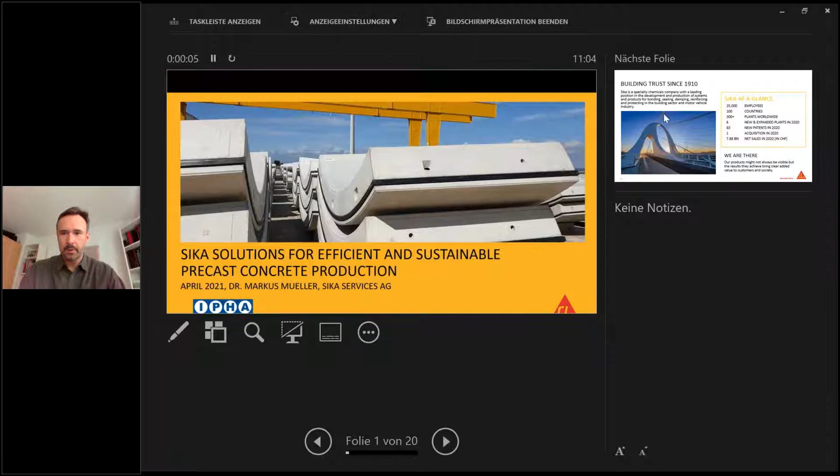Hello again, everyone. Thanks to Thomas for the technical support, and to Carsten Friberg for giving us this opportunity to introduce ourselves and at least have some kind of interaction in these socially challenging times. As it was introduced, I'd like to provide you our efficient and sustainable solutions for precast concrete production in a short presentation.

First, for all of you who don't know Sika yet, we are a construction chemicals company. We provide chemical additive and admixture solutions to concrete producers and many other producers and industries. Around 25,000 people work for Sika today in 100 countries, so on every continent you find Sika. Even if our products may not be visible all the time, since there is no Sika logo on the final end product, they are actually quite widely used and distributed. For example, about every second car drives with some Sika products inside.

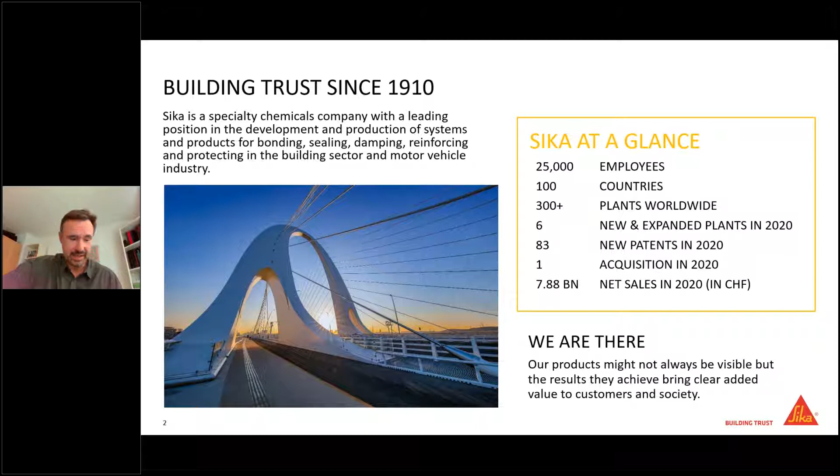So which markets are we working on? You see, first of all, concrete, but also many others: waterproofing, roofing, building finishing, flooring and coating, sealing and bonding, refurbishment, and several industries like automotive.

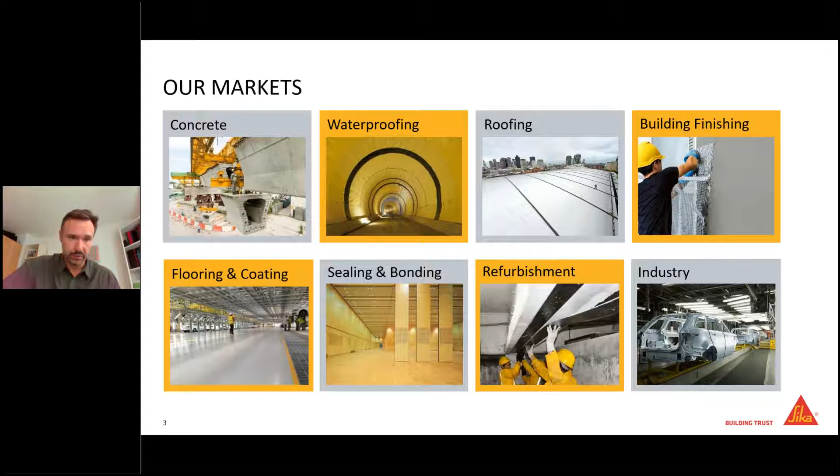We have a strong focus on R&D, since this is actually the backbone for our innovative solutions. More than 1,000 people are working in this R&D department, distributed in 21 technology centers all over the world. When I'm talking today about sustainable solutions, just to make clear, this does not mean that we don't have performance increase or cost efficiency. Actually, our focus is on adding value by increasing the performance plus giving additional sustainability benefits to our customers.

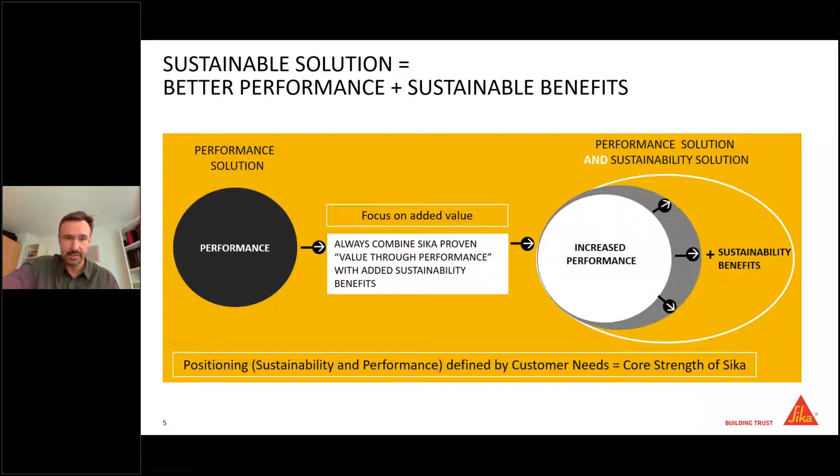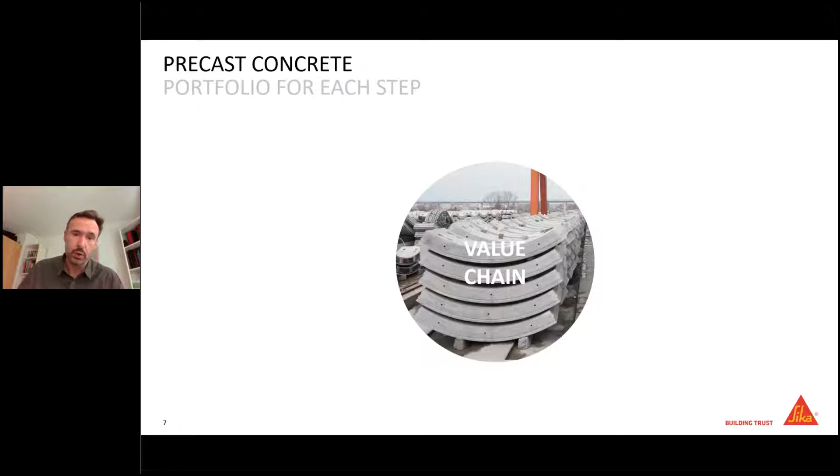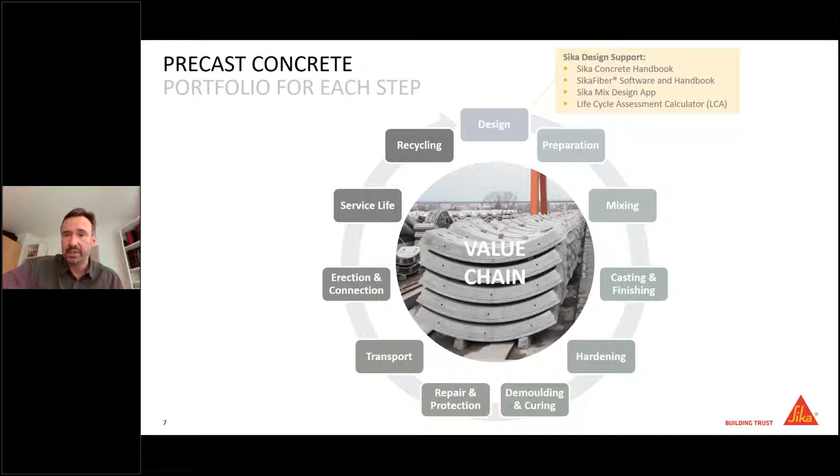But let's talk about concrete. Those who produce concrete elements know their value chain well. It starts from the design and ends in the final recycling after the service life of the element. Sika is a full range supplier, so for each of these steps in the value chain, we provide solutions. This starts with tools and services in the design phase, software, handbook. Maybe some of you have already downloaded the Sika Concrete Handbook. It's available at sika.com. Just released a new version, by the way.

But also in the later steps, several products get applied. I'm not talking in this short presentation about each of them. The most important or most relevant ones I will introduce separately.

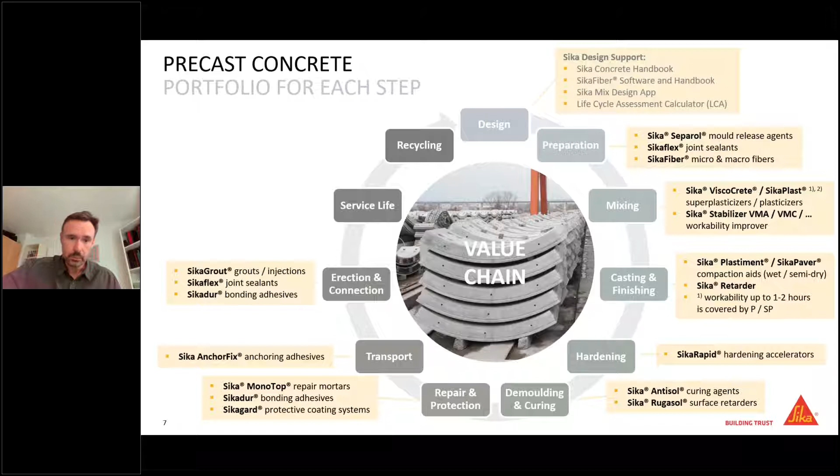Of course, most important for the concrete production process. In particular, the steps here on the right side. Here the admixtures which come into the concrete mix itself are most relevant, and at the same time more concrete admixtures are mentioned here, which are more focusing on the improvement of the service life, durability, concrete strength, concrete quality and aspect. But let's look further into more details.

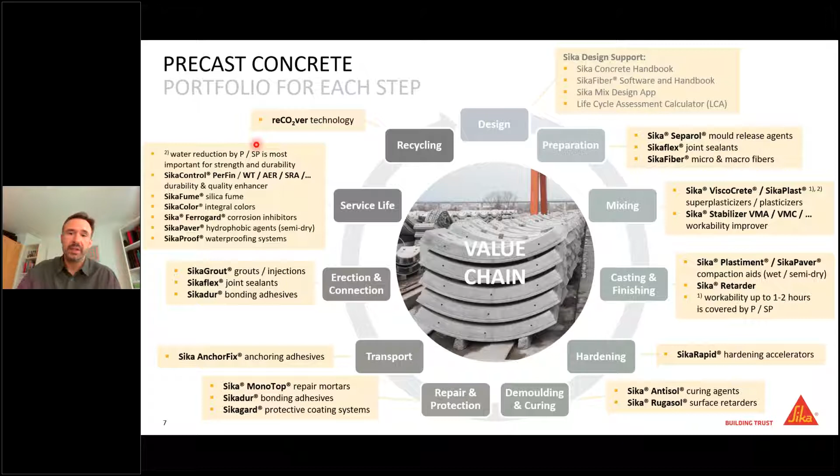We all know that we are living in a fast changing world, and a few challenges are ahead of us for the whole society, for the whole construction business, including concrete producers. That is driven by global megatrends and related laws and regulations and additional construction issues.

Challenges, especially for concrete producers, are carbon neutrality - producing cement or using cement with less CO2 footprint, using alternative binders, using other mechanisms or tools to reduce the clinker content in concrete. At the same time, resource efficiency will be a continuing challenge.

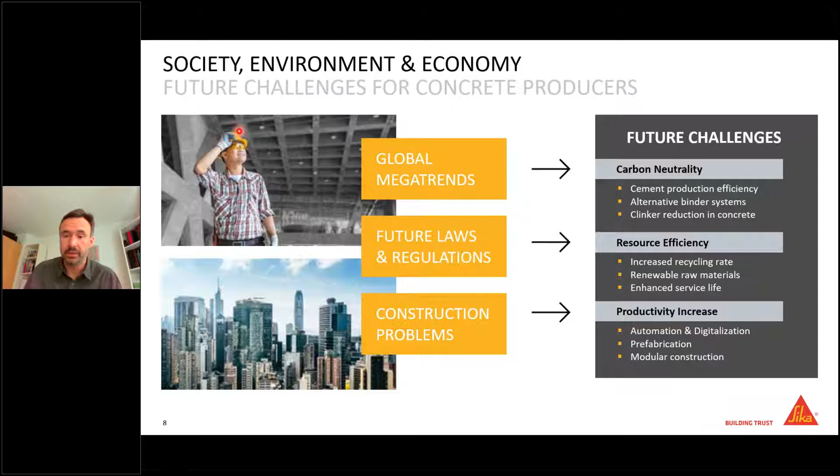Increasing recycling rate is here a key, but also using renewable raw materials and enhancing the service life of concrete. And last but not least, increasing the productivity with automation and digitalization, with prefabrication and modular construction.

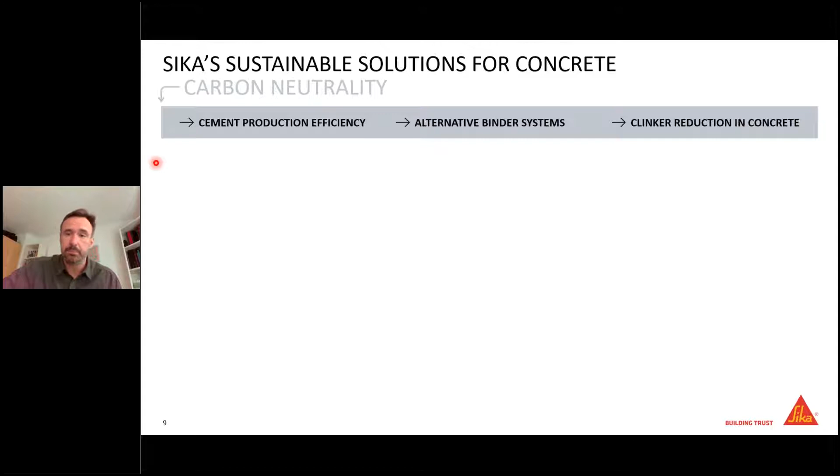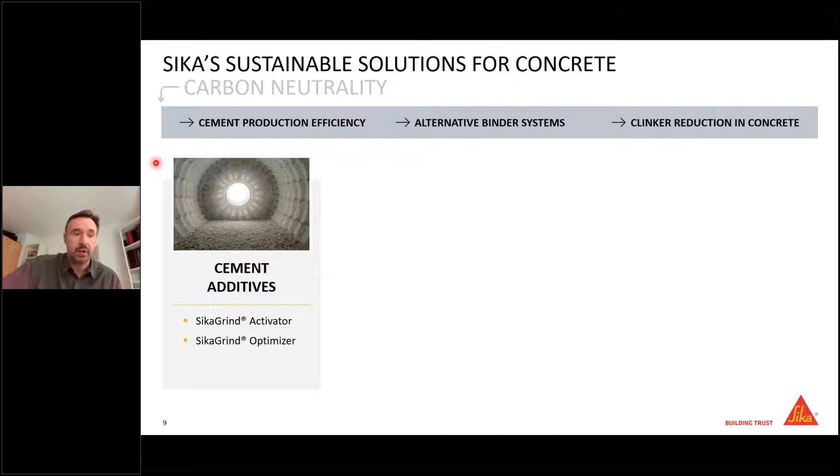And for each of these challenges, we have developed solutions. For cement producers, less relevant for concrete producers, but just to let you know, cement producers are using our additives to increase the efficiency of the milling process, but also to improve the quality of the cement. We have developed an admixture technology that allows a very interesting future binder system, so-called LC3, but I will come to this in a minute.

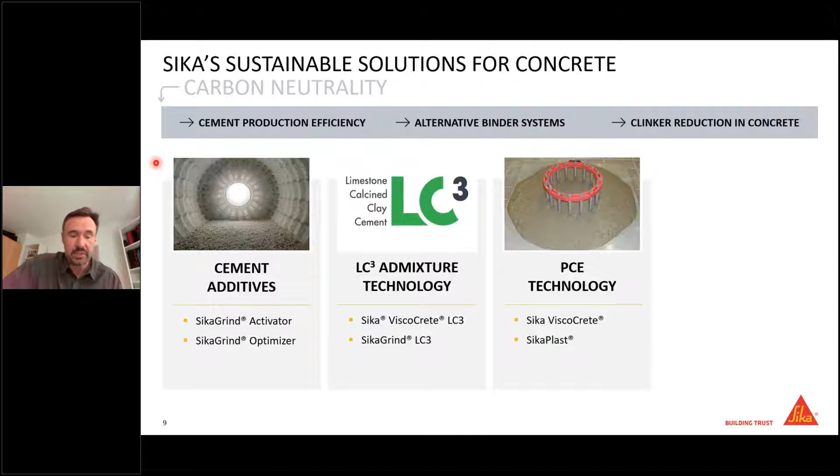PCE technology is a key technology. We believe many different targets can be met with it. And also an interesting recycling process has just been developed by Sika, the so-called reCO2ver process, which consumes CO2 during the recycling process of concrete, and the outcome is a high quality aggregate, and at the same time using all components of concrete, separating the cement paste from the sand and gravel, allowing for up to 100% recycling rate.

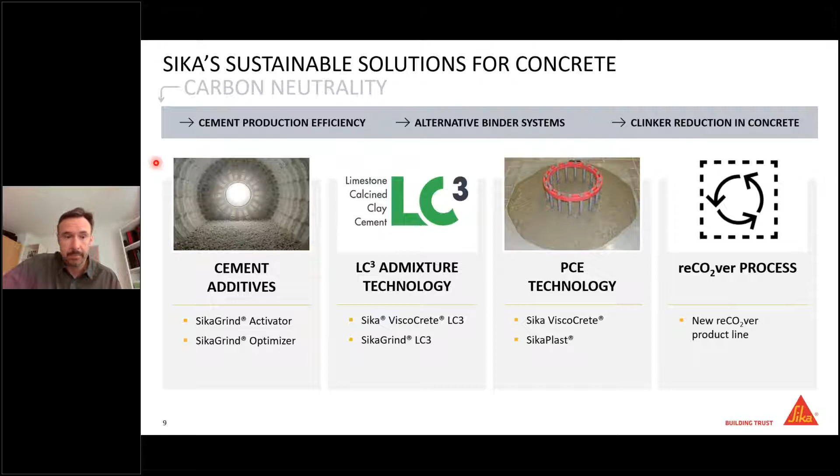So what does it mean, carbon neutrality solutions by Sika? To give you a feeling of the dimension, we are adding just a few drops of our chemicals to concrete - on average, maybe only 5 kilograms per cubic meter. But for cement production, our grinding aids can already contribute around 20% or more of CO2 reduction. And together with the benefits that concrete admixtures bring, we end up at a total potential of 40% CO2 reduction in concrete.

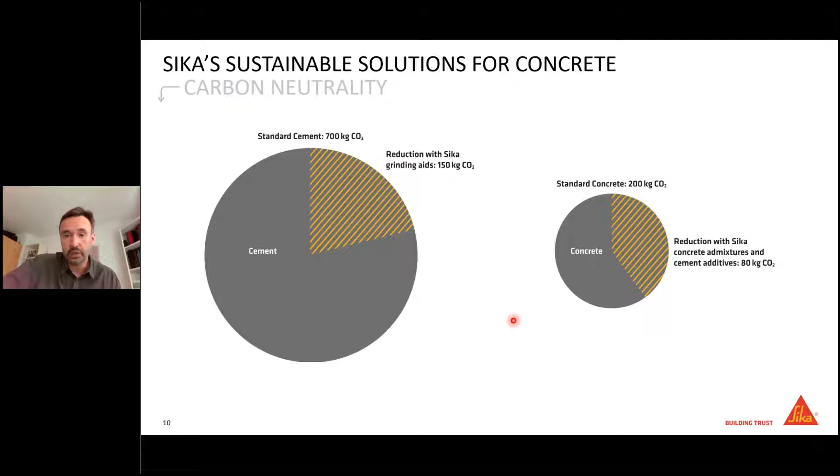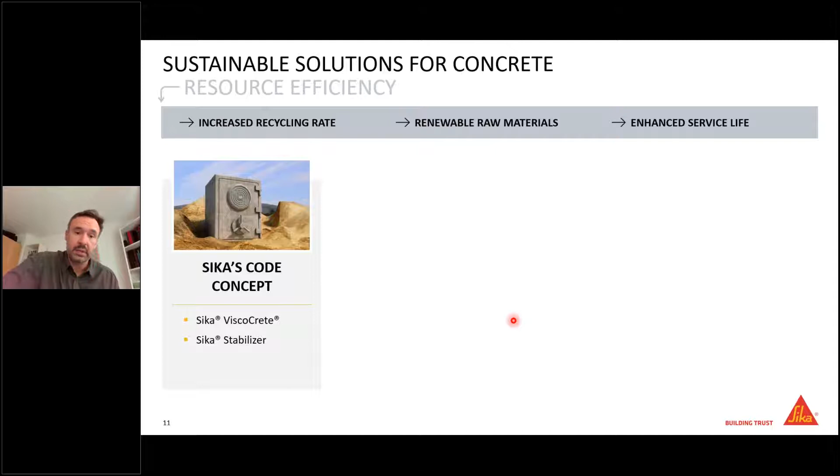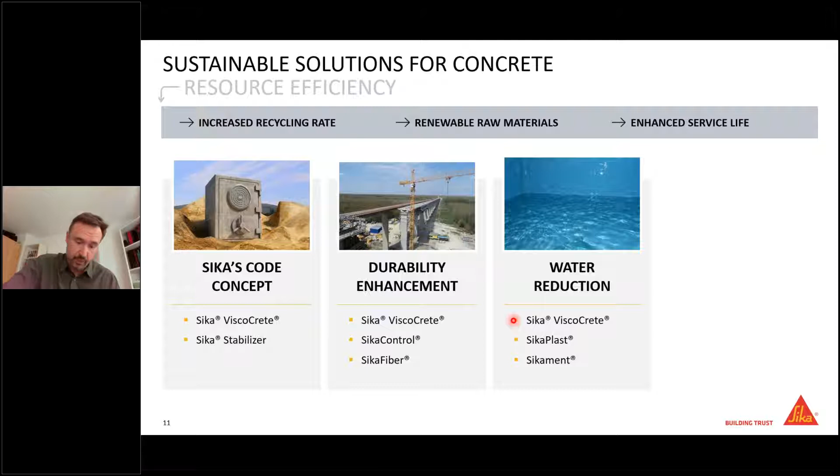Furthermore, concerning resource efficiency, we have tools developed including the Sika's Code concept, I will come to this in a minute as well. Durability enhancing technologies, water reducing technologies, which allow savings of huge amounts of water. To give you a figure, in 2020, the use of our concrete admixtures saved 6 billion liters of water.

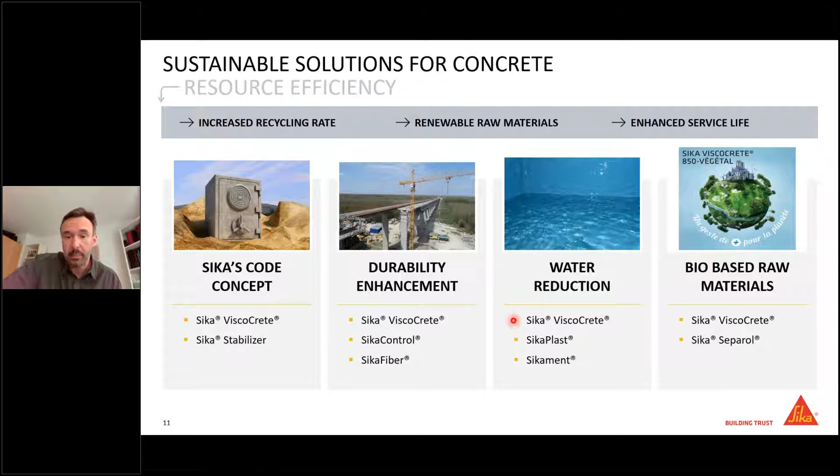And we are working on and have already developed bio-based products - products that are no more based on crude oil, but using renewable raw materials.

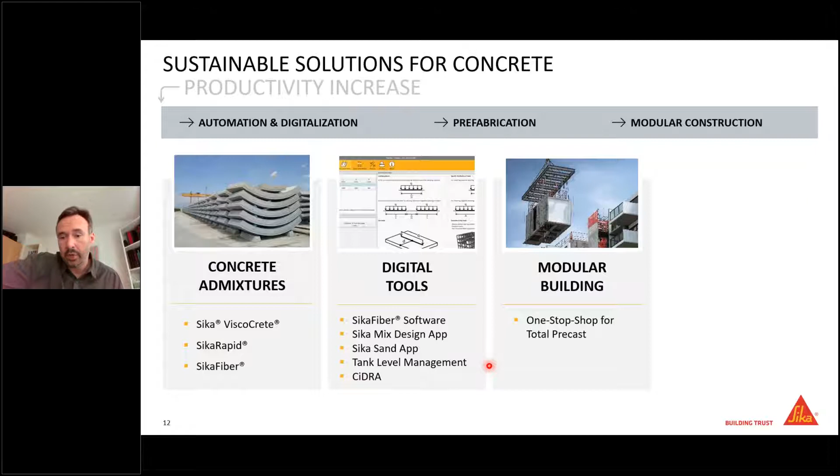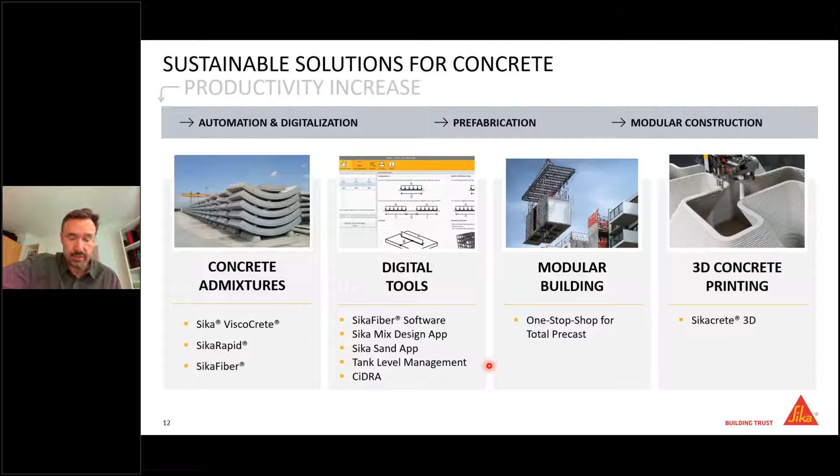For productivity increase, we have tools like the admixtures again. Also here, I will show you examples right after this slide. Digital tools, solutions for modular building. I told you on an earlier slide, with our total precast solutions, we would like to be a one-stop shop for modular building producers. And finally, we are working on 3D concrete printing. We have a complete technology system developed here, and whoever is interested in this technology is warmly welcome to get used to it.

So some examples of admixtures or products and solutions. The first, and I think the most important one, is the polycarboxylate ether-based superplasticizer technology. Most concrete producers know this and apply such products already. The most interesting benefit compared to conventional plasticizers is that you can really change the architecture of these polymers and make tailor-made solutions out of it, with the target to cost and performance optimize concrete mix designs.

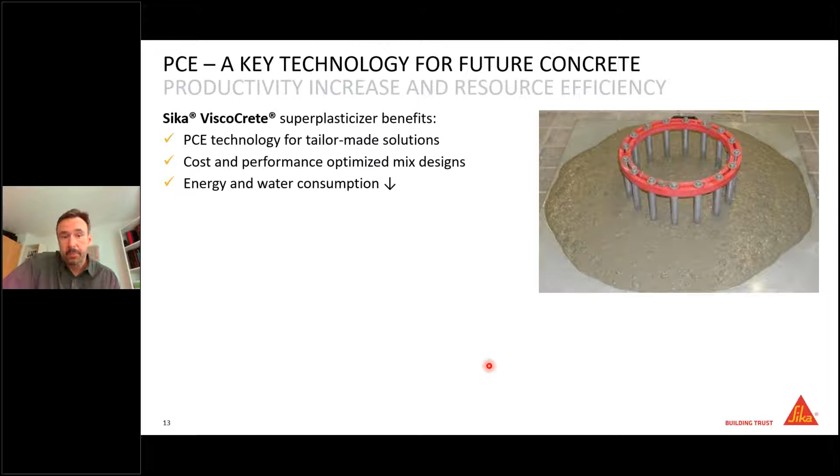So reducing water cement ratio, saving cement, and further benefits - reducing energy, reducing water consumption, enabling easier processing techniques like self-compacting concrete, which makes the whole process of concrete production more productive, reduces operating costs, and increases or improves surface quality, strength, and durability.

This technology also allows for slimmer element dimensions, in an extreme case using high performance or even ultra high performance concrete, which would not be feasible without PCE technology. And of course, with all these benefits, this technology reduces the environmental impact of the complete concrete.

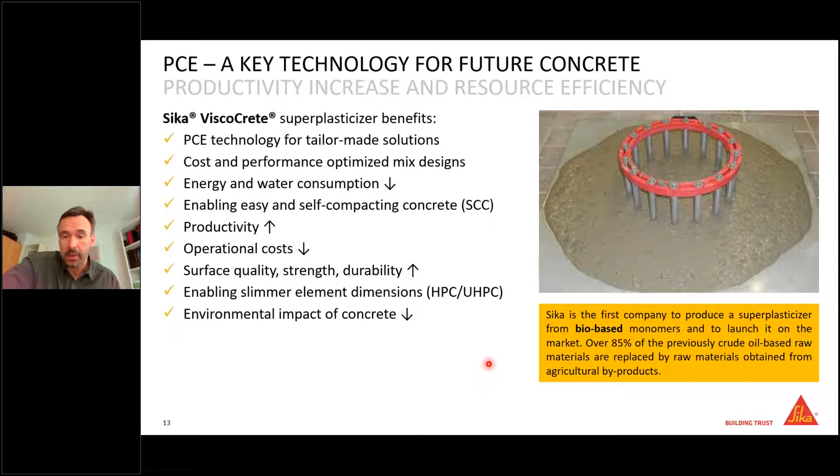And Sika is proud here to have the first bio-based product on the market. The majority of these products are usually crude oil based, and our products here are based on agricultural byproducts.

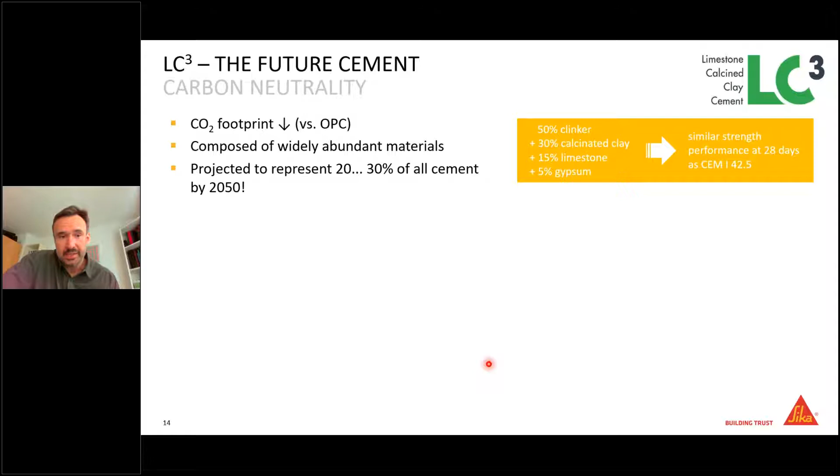PCE technology, together with other admixtures, allows the usage of a very interesting and promising future binder system, the so-called LC3 technology. I don't know if you are familiar with this. It's a very challenging approach, reducing the cement clinker by 50% by adding calcined clay and limestone to it.

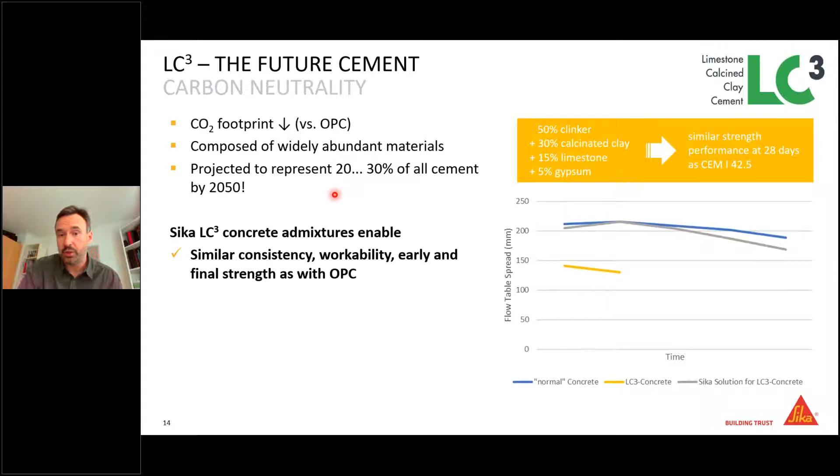The challenge was that a concrete produced with such a cement has significantly weaker flow performance or consistency. So it was necessary to develop admixtures which allow the use of such binder for concrete with similar consistency, workability, and early and final strength development as with OPC. We believe, and not only us, that this is an upcoming technology projected to represent 20 to 30% of all cements by 2050.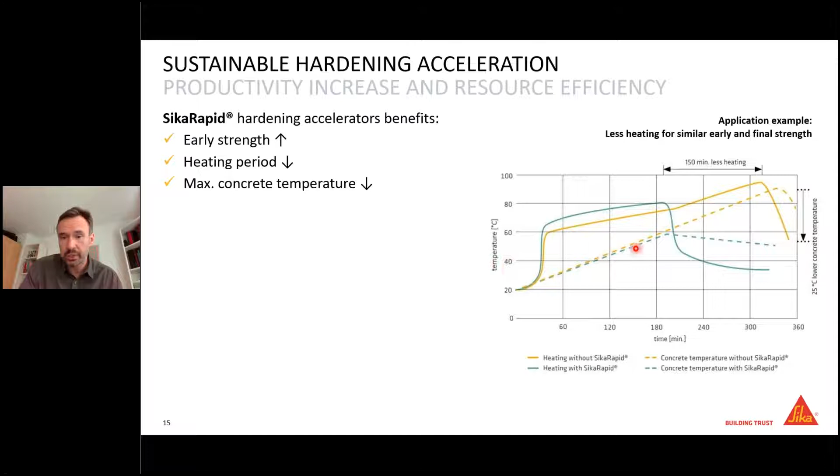You see the concrete temperature here in this dashed line. It's very important not to exceed a certain value, maximum 70°C is said to be the limit here. Otherwise, you may run into significant durability problems, cracks, and so on.

The benefit is energy consumption reduction, productivity increase, shorter cycle times, with that operational cost reduction, and clinker reduction. So if the amount of binder or cement was required to reach a certain early strength, the application of such a system allows for binder reduction. At the same time, durability increases—less OPC is a key reason for the durability increase, but also the mentioned temperature effect, reaching not such a high maximum temperature, reducing the overall carbon footprint of concrete.

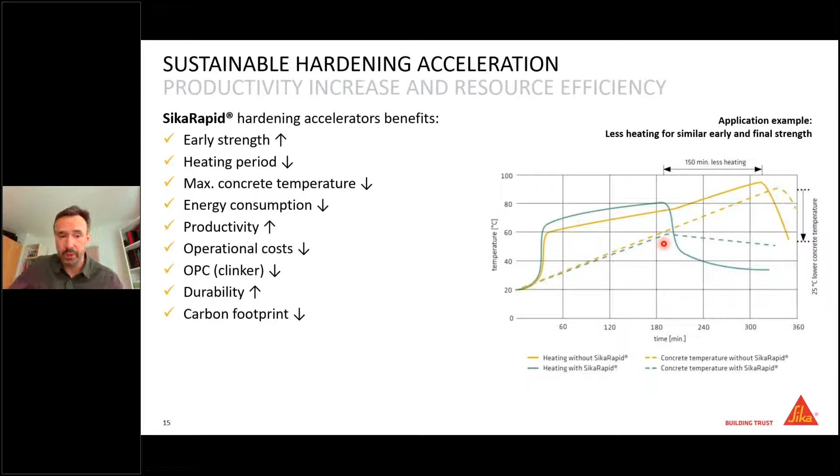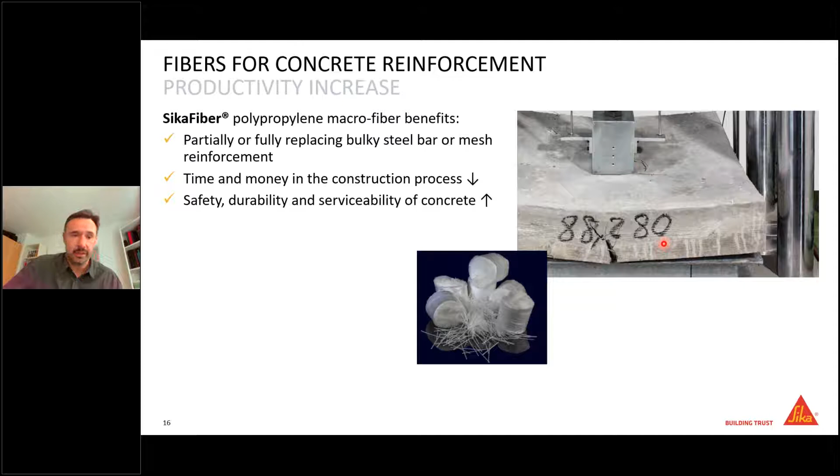Another technology I don't want to miss introducing to you is the Sika fiber technology. These polypropylene macrofibers can substitute reinforcement. Fibers are already widely used for crack reduction and increasing abrasion resistance, but actually these fibers can partially or fully replace steel, which saves time and money in the construction process, makes it safer and more durable, and increases concrete performance.

These are easy to handle products and easy to dose, with self-soluble packaging, for example. We also provide a design software which allows the calculation from a mesh to the fibers.

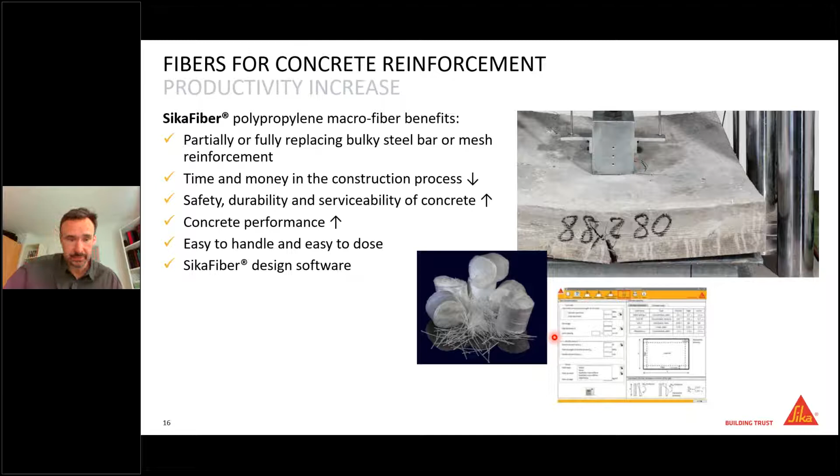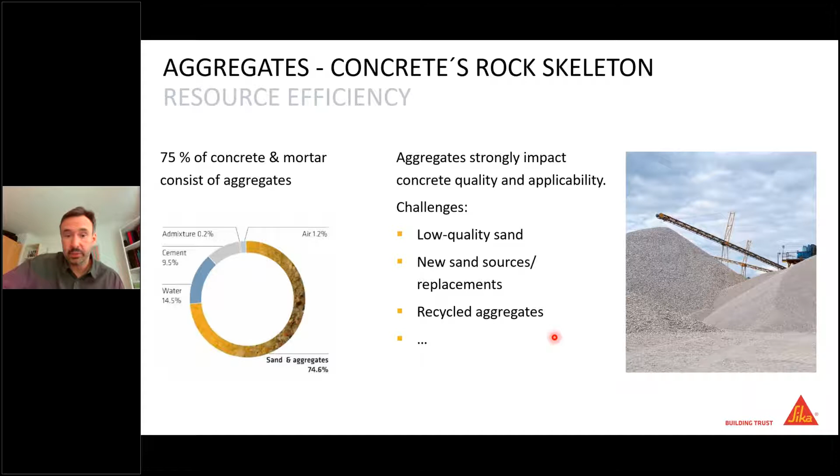Another technology, actually the last one I would like to introduce in this short presentation, is targeting aggregates. You know that the majority of our concrete is made from aggregates—70%, 75% of concrete and mortar consists of sand and gravel. The aggregate quality has a strong influence on concrete quality and applicability. So the challenges will be, and are, using low quality sands, using new sand resources, sand replacements, recycled aggregates, crushed aggregates, just to mention some.

What we provide here is a concept, the so-called Sika Code concept, where we analyze the customer challenge. We have certain tools, including the mix design app, several special testing tools and services that we provide, and a range of products which allow the use of challenging sands. This is something where we cannot just simply provide a product to a customer—we offer our service to work out the solution together with concrete producers.

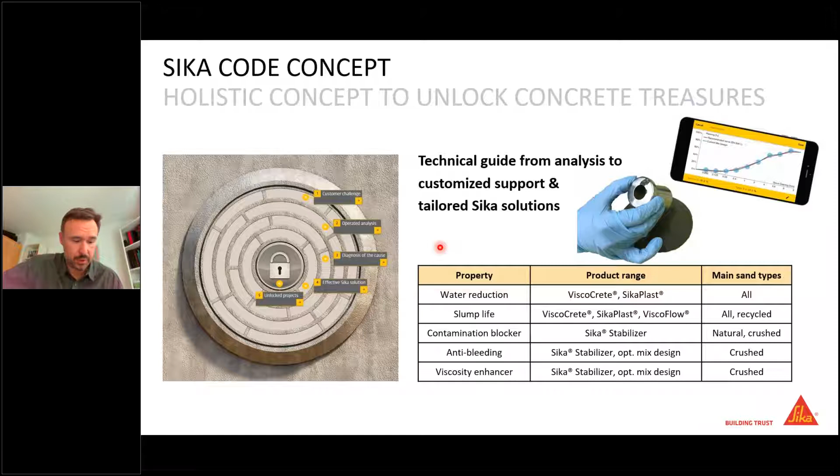My time is over, 20 minutes. Before Thomas reminds me, my key takeaway message for you is: megatrends like sustainability and digitalization drive the growth in the construction industry. And I hope I could convince you that Sika is the right partner with its long-term experience, its focus on innovation, addressing customer challenges, adding value through performance and sustainable solutions, having a full range ready for precast, and being globally active while locally available.

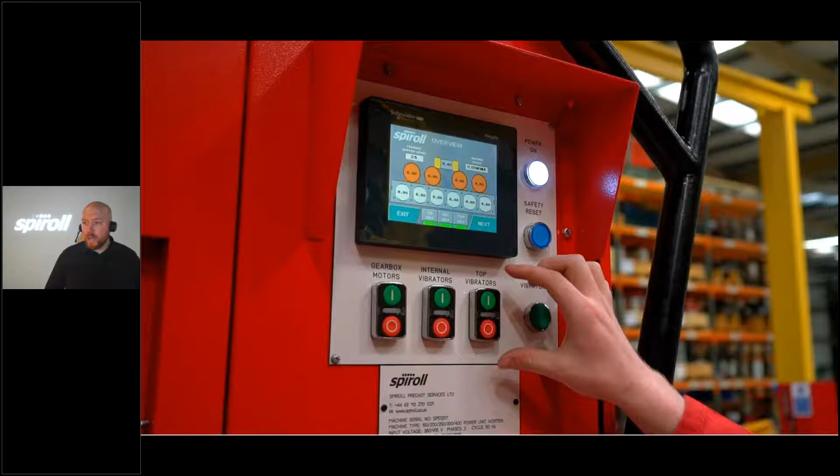I look after the production and the product commercial sales for the CCL and Spiroll company, of which we have 31 privately owned subsidiary companies internationally, with currently about 650 employees. These are just a couple of shots from the factory, showing some of the control systems of the extruders, some of the build area, and a couple of the machines in action.

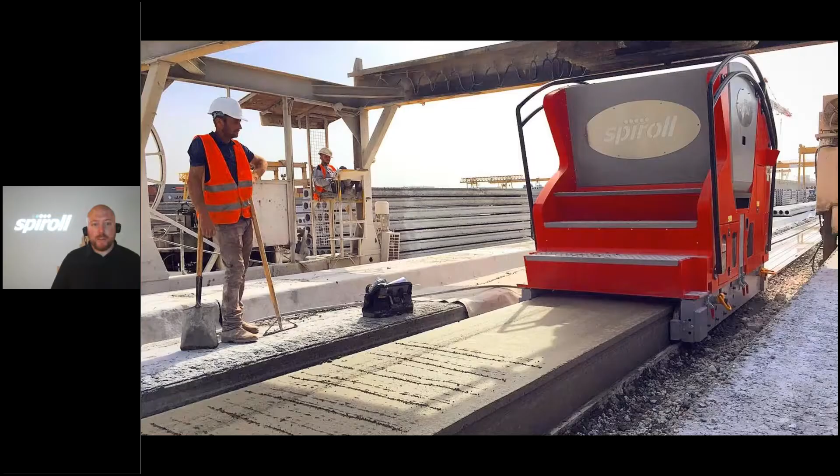This is a 400mm slab, and we do have a couple of outside plants with the high frequency vibration of the slabs. You get a really heavily compacted slab, which actually stands up well to weather conditions on outdoor plants. This is a recent installation in the Ivory Coast in Africa, which is the first producer in that region.

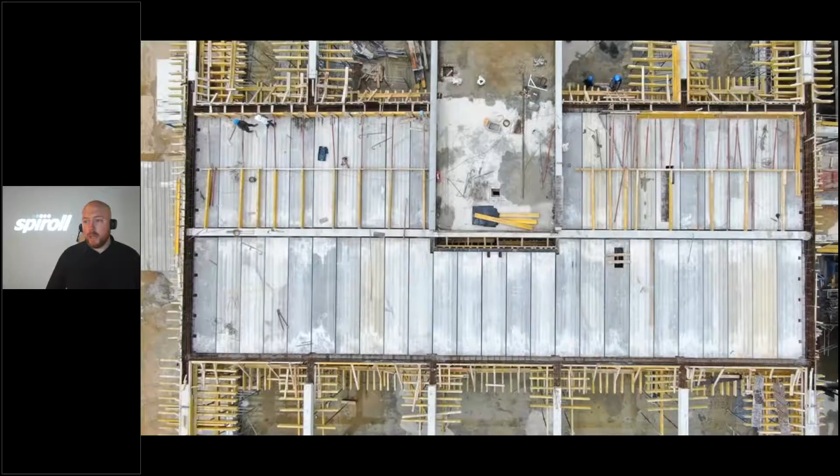So just back to a bit of an introduction on myself. I'm an engineer and graduated from the University of Manchester with a degree in mechanical engineering. I've been with CCL and Spiroll for nearly 9 years, but before my employment, I worked for several years in an automotive manufacturer, and most interestingly in the quality side of production.

So my talk today will focus on a failure analysis tool which is ingrained in the automotive industry and is applied to almost every part produced. This photo just shows an example of some of the turbocharger parts that I was involved with.

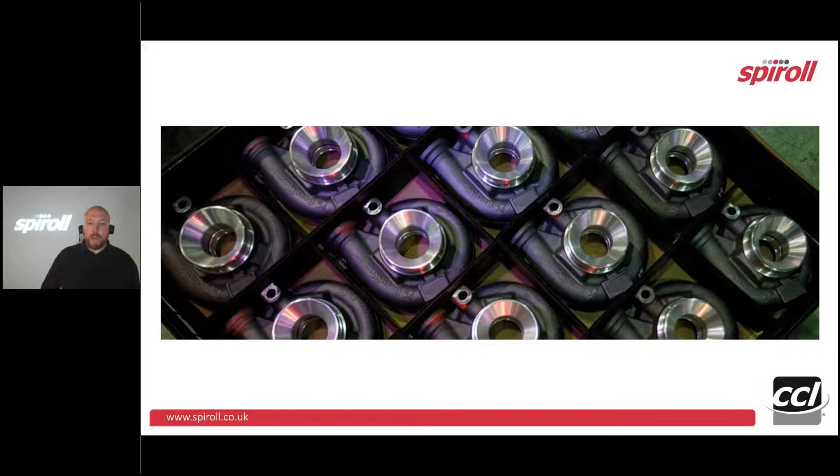In my role currently, I'm personally involved in the volume production of construction products, so wedges and barrels and things. I'm also involved in their certification process and production control from a CE marking perspective, and also other international certifications. But in my experience, none of the construction industry requirements really push the envelope of analysis like some of the other production industries do.

So in this presentation, I will simply apply some of the thinking of some of the automotive quality systems to a precast manufacturing situation. This is also, as part of IPHA, we're all manufacturers to some extent, so this is entirely applicable to not just concrete product manufacturers, but machinery and everything.

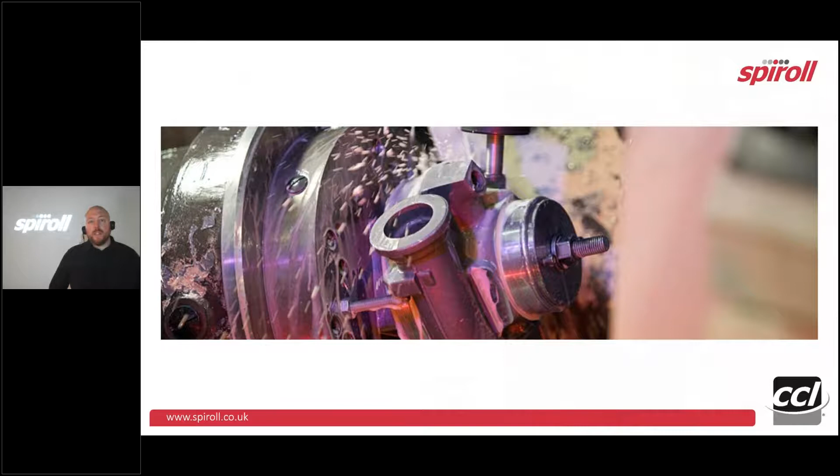In my presentation, production support activities are defined as the processes and functions required to produce manufactured goods in a consistent, repeatable and safe manner. So this could be raw material control, equipment maintenance, batching control, and anything which is linked really to the final end product.

So most of you, if not all, will have some form of quality management system, and some can be sort of basic and certified to regional standards, and also recognised by other international bodies. There are also requirements from a product-to-product point of view that may be required. But basically, rigorous process and factory production control goes further than the standards and the legal legislative requirements.

And the analysis tool I will introduce you to today is called the FMEA. FMEA stands for Failure Mode and Effects Analysis. It's a systematic, proactive method of evaluating a process to identify where and how it might fail, and then to assess the relative impact of these different failures in order to identify parts of the process that are most in need of change. So it's quite similar to sort of risk assessment type thinking that some people may be used to, but not just from a health and safety point of view.

This applies to your production processes. It can also be applied in a design setting as well.

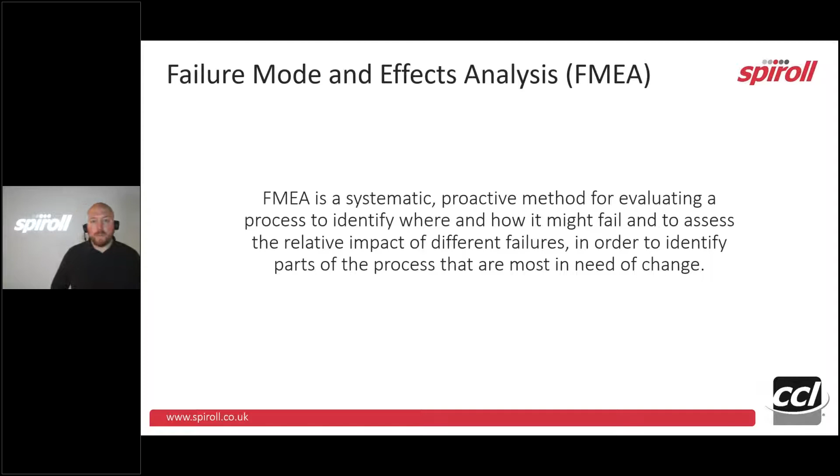FMEA, Failure Mode Effects and Analysis, is a highly structured, systematic technique for failure analysis. It quantifies the severity, the occurrence and detection likelihood of failures. It is used widely by the military, aerospace, automotive, tech and food industries.

Typically an FMEA is produced for each product or family of similar products, and the FMEA document is best developed by a cross-party group from different departments within the company, so you get a different aspect from various departments.

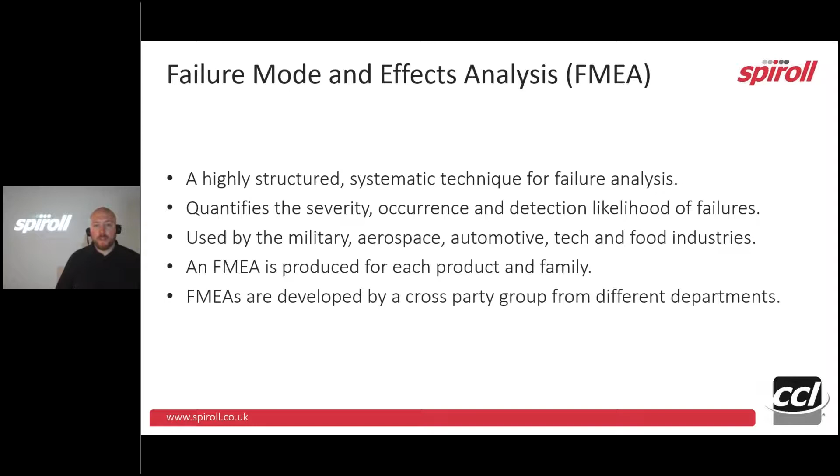An FMEA is developed in a table format, and shown on screen here is an example, just very simplified. I've personally seen these run to several hundred lines for certain products, but this will focus simply on the function of a car tyre as an example.

The function being the supporting of the weight of the car, the traction and the comfort. So imagine that's the function we're looking at in the process step.

Then the second column has the failure type, in this example a flat tyre. Alternatively, this could be an out of balance tyre, a worn tyre, low pressure, high pressure, wrong specification, and each of these avenues would have its own developed line of analysis.

After that, you decide in your cross-party team on the potential impact of the failure and score the severity of this impact, given by a predetermined score system. In the severity column, this could be a score of 10 for a fatality, down to a 1 for a failure noticed by less than 10% of the consumer or customer, with all other scores described between 1 and 10.

Then the next column is the cause of the failure. Again, there could be multiple scored 1 to 10 on the likelihood of occurrence, between 10 meaning you pick up the failure every time, or 1 meaning it almost never actually occurs.

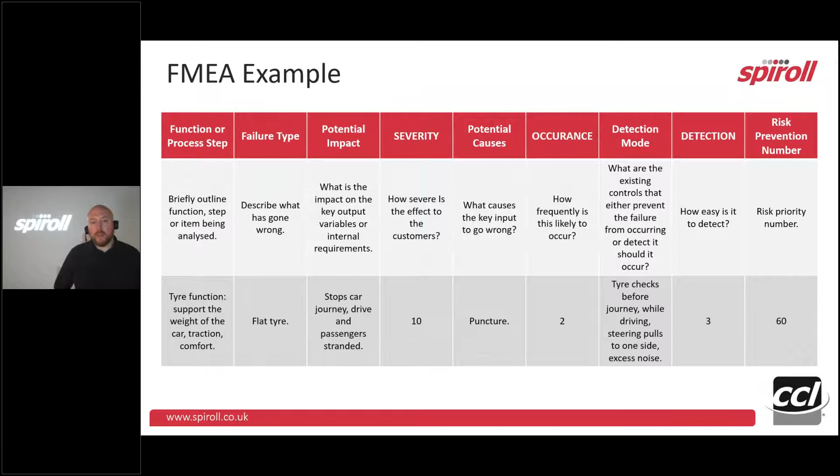The manufacturer can then introduce actions to the particularly high risk prevention scores, along with responsibility and target completion dates for the actions, and can then rescore the failure, severity, occurrence and detection scores with the control actions in place.

In this example, the action is to carry a spare tyre and the tools required to change the tyre. When this is rescored, it brings the overall risk prevention number down to a manageable level.

This document, once formed, acts as a dynamic document that over time will, in very detailed form, describe the processes and controls required to ensure your product is manufactured in a consistent, repeatable and safe manner.

So from now, I will apply these to four simple best practice examples using the severity, occurrence and detection FMEA thinking.

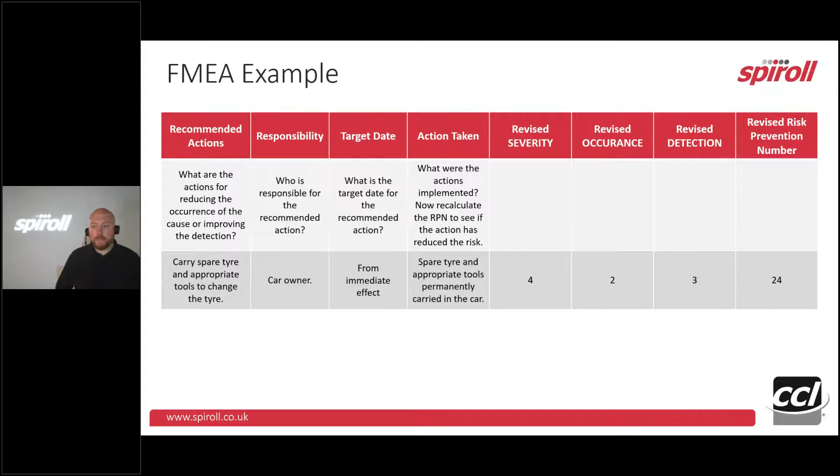My first example is barrel and wedge usage and their maintenance. All Hollowcore and many other precast products use pre-stressed wires or strands in their production, meaning they use barrels and wedges to grip that tension. Let's focus on the wire and strand stressing, for instance.

The severity of a failure can be extremely high. The rigor and maintenance of the care routines will affect the occurrence, and the detection score is also high because the detection of a potential failure is difficult until the actual failure occurs.

The resultant controls typically, but not always, applied are things we have seen and also implemented, like stressing alarms - an alarm ringing in the factory when stressing is carried out - and strand containment chains up the bed.

There's also care and inspection training and work instructions for the operators for the products, routine replacement of equipment using batch control systems so you know which are clean and which are in use, and typical stressing guards and any segregation in the factory and working environment.

We supply many factories with barrels and wedges, and we do see some fantastic processes in place, but also sadly we see some pretty poor ones as well.

The million dollar question is usually, how many times can we use these? We typically say with great processes you may see hundreds, 300, 400 uses, but if they're really poorly looked after, you could have just a handful of uses.

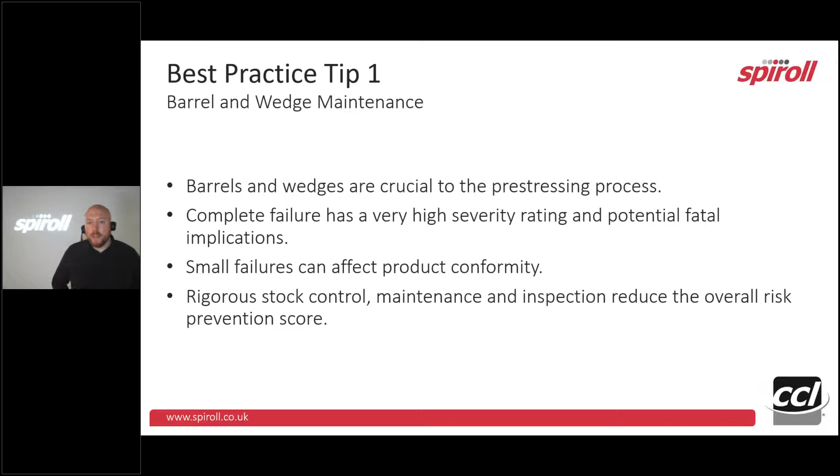My second example is looking at calibration of equipment, tracking and its maintenance. This can apply to anything in the factory, be it extruders, stressing equipment, cranes, portable electric items such as grinders and drills, or even fixed installations like electrical or pneumatic systems. All of these pieces of equipment and systems have failure potentials, each varying in severity, likelihood of occurrence, and how easily they are to detect. But the best practice approach, which we've implemented in our production environment and site operations, is a rigorous asset management system.

We developed a system through Microsoft SharePoint that allows us to allocate a unique identification number to each item or system. We then plan the maintenance, calibration, servicing, inspections or testing for each item, along with a location and an owner. The system uses a red, amber and green status tag to easily show if the asset requires attention, so we can plan these activities ahead of time and make sure they're completed in a timely manner. From an FMEA point of view, this reduces the risk prevention score and shows controls are working to prevent failures. Again, in factories we visit, often these types of processes are not in place.

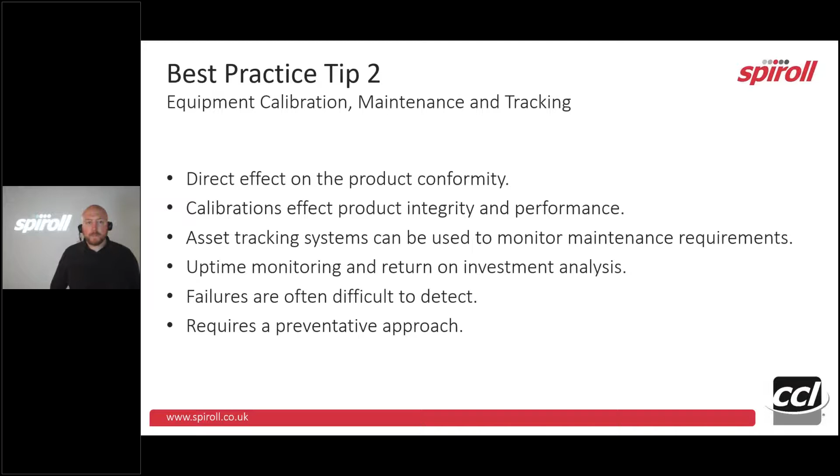My third point is looking at raw material inspection and traceability. I could ask, do people have robust and rigorous incoming goods inwards and material checks? Because failure of your raw material to meet specification can have severe effects on the product, which are also likely difficult to detect.

This would be a good use of FMEA, to look at each of your raw materials going into the product and analyze the effect of failure to meet the required specification. This can even go so far as routinely checking quantity, which can be difficult for bulk materials. Our best practice advice, similar to what we've implemented to reduce the risk prevention score, is to have a robust set of simple inspection techniques built into the process.

These could be built into the process using simple specification work instructions that operators could understand. Often material standards can be very complicated and not easily understood by anyone other than technical staff, who are often not the guys actually hands-on dealing with the material.

By employing a simple set of codes, for instance we use things like MAT 001, MAT 002, up to MAT 054 now in our factory for each of these materials, our staff can easily check the material certificates supplied with the products and other delivery requirements we might put, for example for strand bundles we have a direction, a maximum size and weight, and things like that. Again, this helps limit failures in the process.

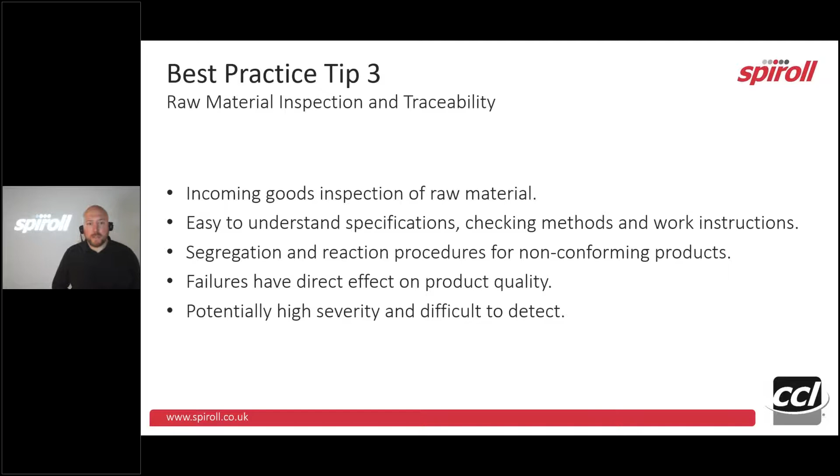The final best practice tip, a slightly different way of thinking about it, is talking about the extruded or slip-formed slab profiles, strand wastage and production planning. If you consider the failure of any of the above, this can have a financial impact on the business. Other IPHA presenters have touched on this previously. I recall a presentation by Hollowcore and some of the Elematic guys explaining that the proportional cost of product taken up by actual raw concrete material is the highest cost per linear meter.

So failure could be in not optimizing your slab profile design, and the failure of this again can have a financial implication. You could be producing using old technology, poorly maintained machines, or wrongly set machines. The severity here has a high financial impact, the occurrence is typically quite high, and the detection can be pretty low. There are simple pre-production check sheets we can supply, or work with people to make sure machine settings are checked before the production run is started.

Another issue we see quite regularly is how much strand is wasted at the end of the production bed. You can introduce a small modification to your abutments to shorten the wasted strand at the end of the bed. We've done this several times with manufacturers, modifying beds and their barrel and wedge setups to reduce this.

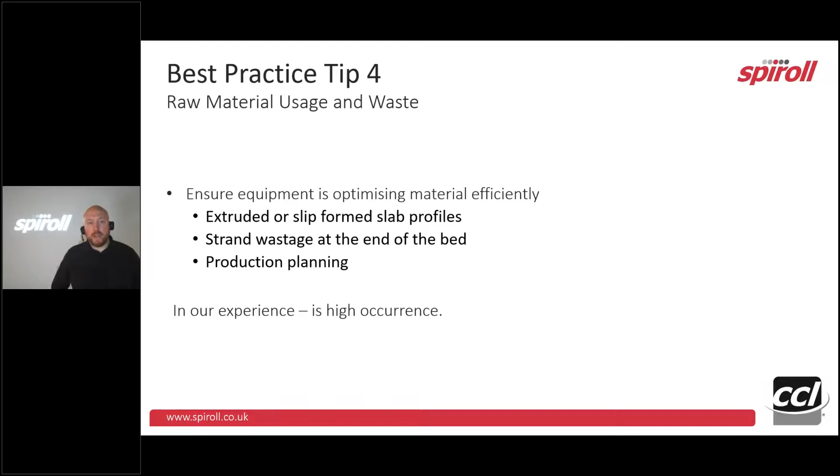In conclusion, it's been a whistle-stop quick tour of FMEA and failure-based thinking, and I hope it has been of interest and maybe sparked a thought in this area. In my experience, construction product manufacturing often lags behind other industries in adopting and implementing these lean process controls. I hope in the future the industry may adopt these techniques and learn from sister industries a bit better. As Tom said earlier, he can share our details after this. If you have any questions, this isn't specific to Spiroll, but we would happily assist and point you in the right direction. Thank you for listening, and I'll pass you back over to Tom now.

Thank you very much, Ed. No questions from the audience. To be fair, you answered the only question I would have had, about adoption of things from other industries into the concrete industry. I think it's a fair point you make there as well. Thank you, thanks very much.

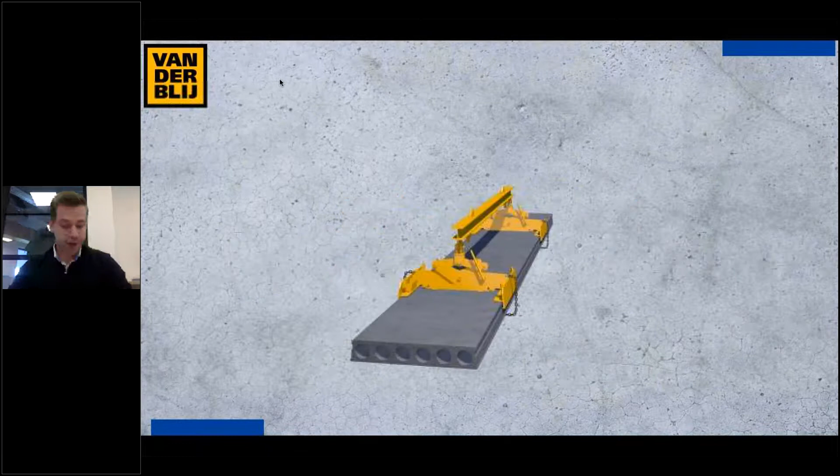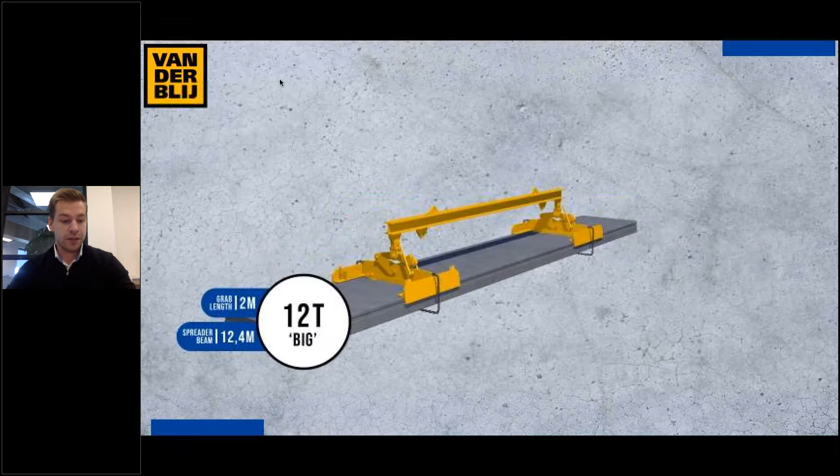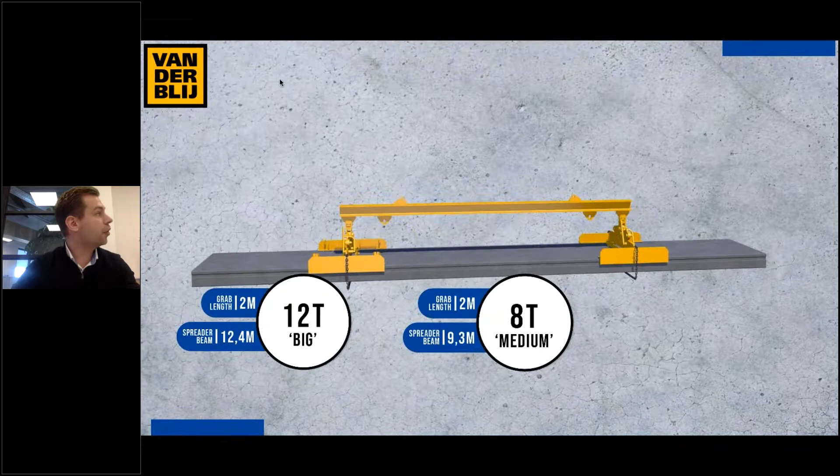Here you see a mechanical grab used for lifting and mounting on the construction site. We have three standard types starting from 12 ton. The length including the grabs is 14.4 meters. We also have an 8 ton version with a length of 11.3 meters including the grabs, and a 4.2 ton version. We provide all these grabs used on the construction site with safety chains.

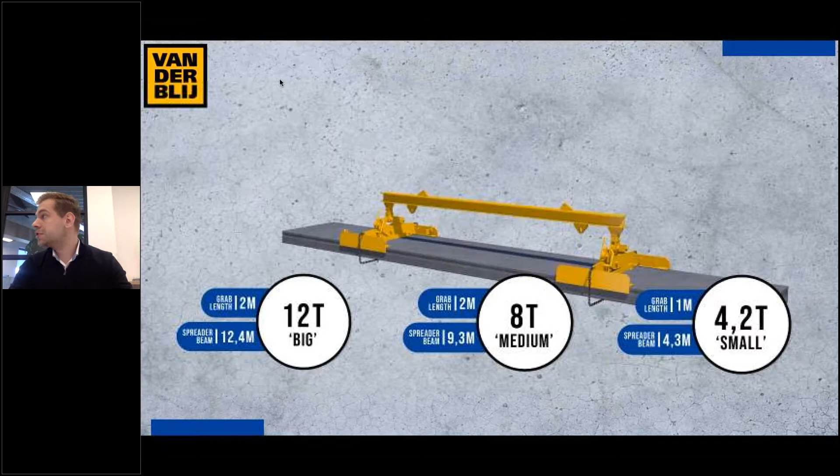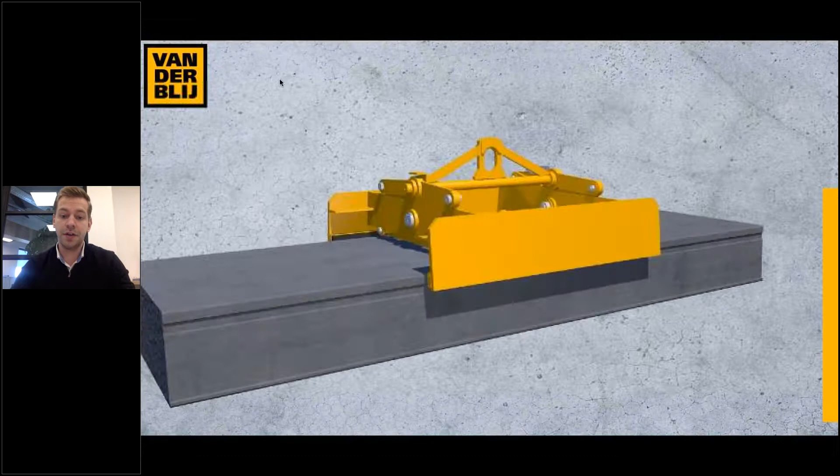The safety chains are used for lifting in high-risk areas like construction sites. We also have grabs used for lifting in the factories, and we provide these with rubber pads because of the strength of the concrete. When we use steel pads in this situation, we could possibly destroy the concrete, so for that reason we use rubber pads to lift these Hollowcores.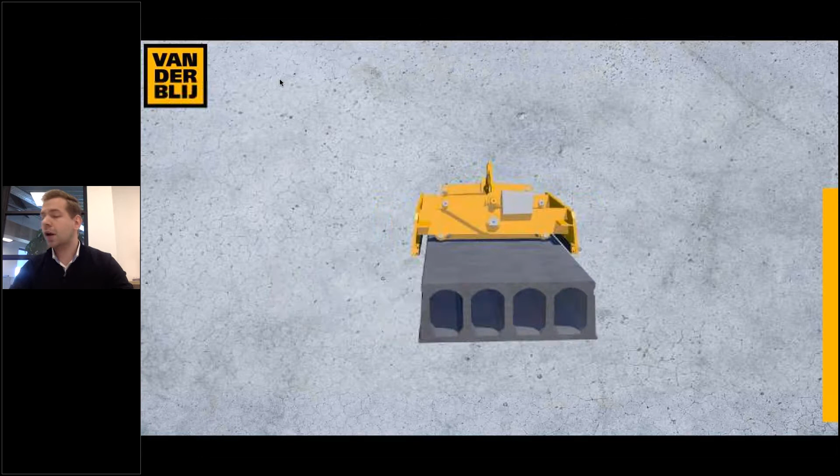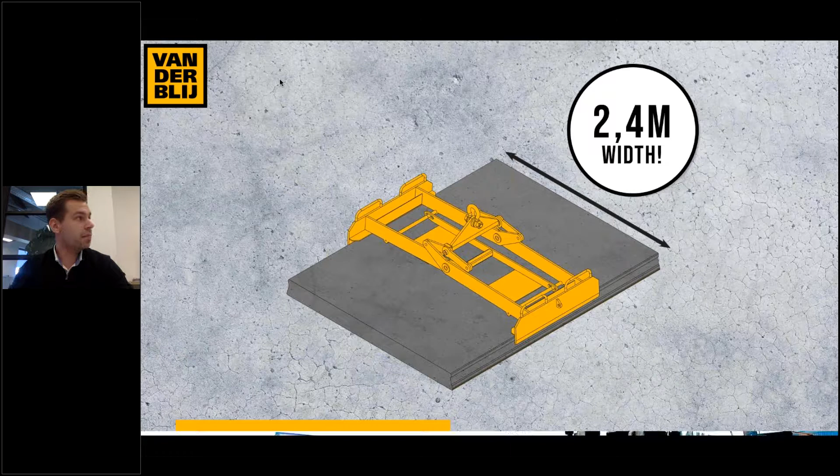In the next 2 slides, you see 2 different custom-made solutions. This one is for the 2.4 meter width Hollowcores, and the next one is used for the forklift trucks. So we can provide custom-made solutions. Everything that's possible, we can provide. We can make, we can produce, and also we can advise you on the best possible way to handle the Hollowcores at which state of the construction.

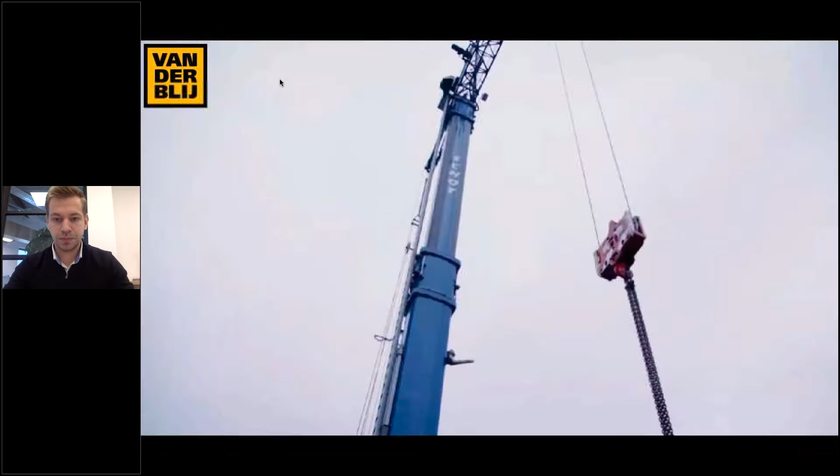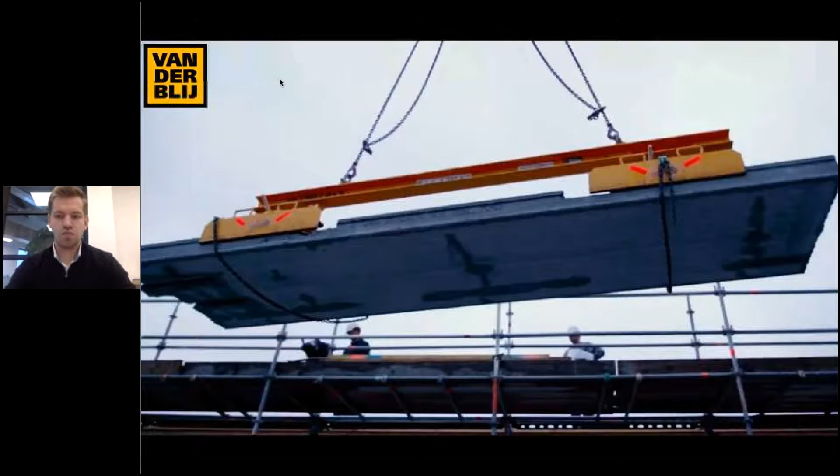Next, some short video, so you could see how the grab used for mounting and lifting on construction sites is used.

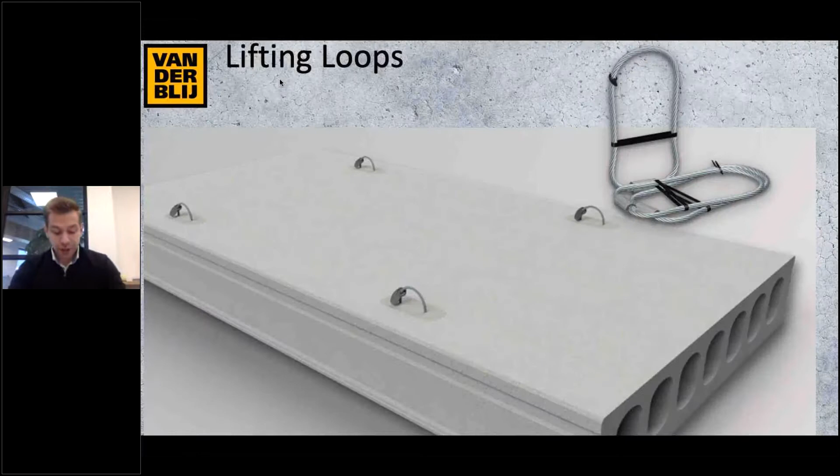Next, mounting and lifting Hollowcores is also possible with cast-in options. First we're going to discuss the lifting loops, also sometimes called a figure of 8. The lifting loops are available from 800 kilo per piece up to approximately 19,000 kilo. The advantages of lifting loops are that they are very easy to install. You don't need lifting clutches; you can use normal lifting chains or something like that. The disadvantage is that cutting is required after you make the Hollowcore.

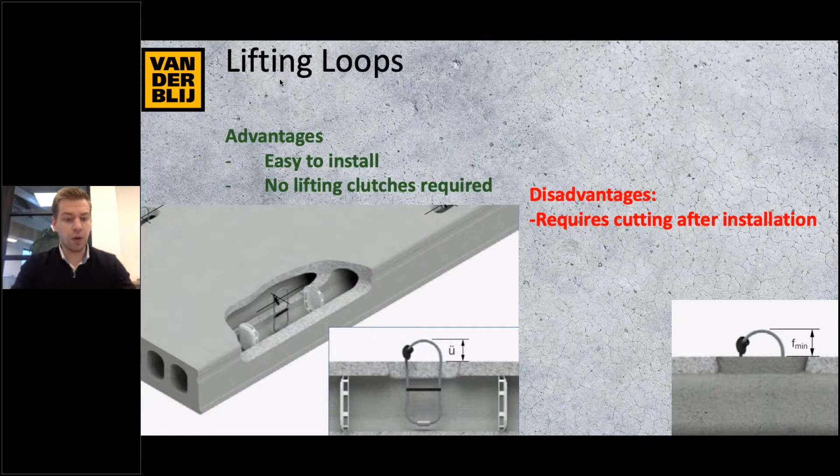Next one is the spherical head anchor. The spherical head anchor is also very easy to install. It's the most widespread used lifting system for lifting and mounting the Hollowcores. One of the disadvantages is that you need to cut the concrete after producing, and you require a lifting clutch. You can't handle the spherical head anchors without the lifting clutch.

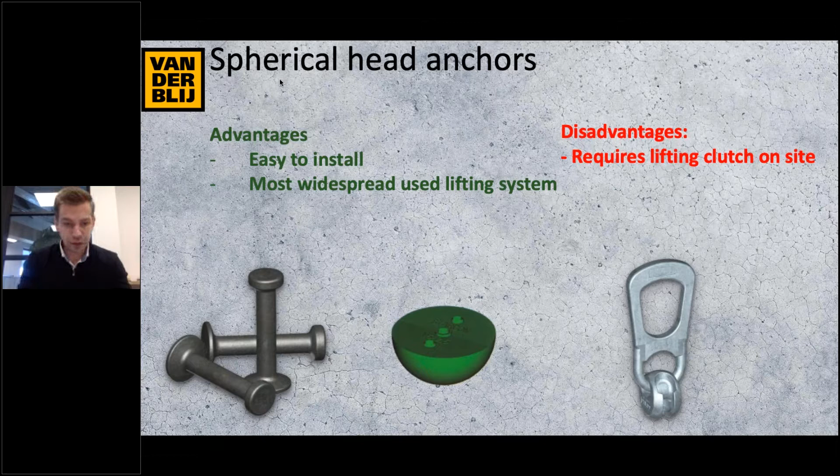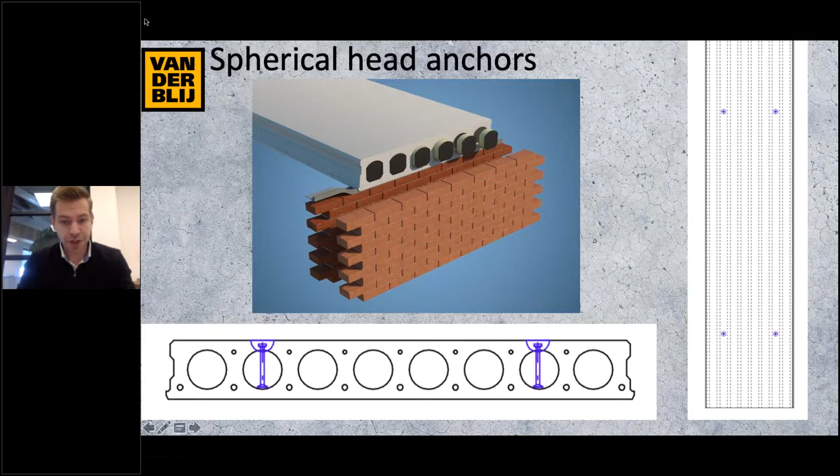Here you see the different positions of the spherical head anchors, one from above and one from the side. You can also see some caps. The caps are used so the concrete will not spread over the whole channel in the Hollowcore. You see that here in the left corner.

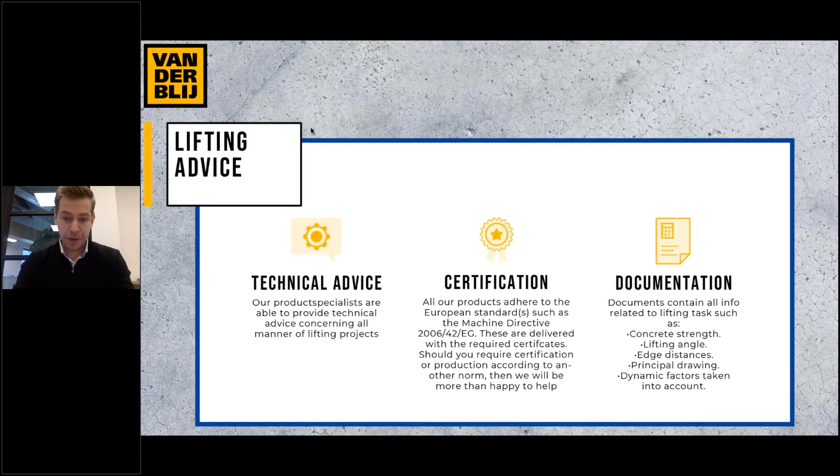So what can we provide? We can provide a lot of technical advice for all these lifting solutions - the lifting loops, the spherical head anchors, and also the different mechanical grabs we can make. We provide all the solutions with all the certifications and documents, within the CE and machine directive requirements. We also make a calculation for it, and if necessary, we can show you what calculations we made for which lifting solution. So in that case, we can deliver the whole package: the product itself, technical advice, and all the certifications and documents.